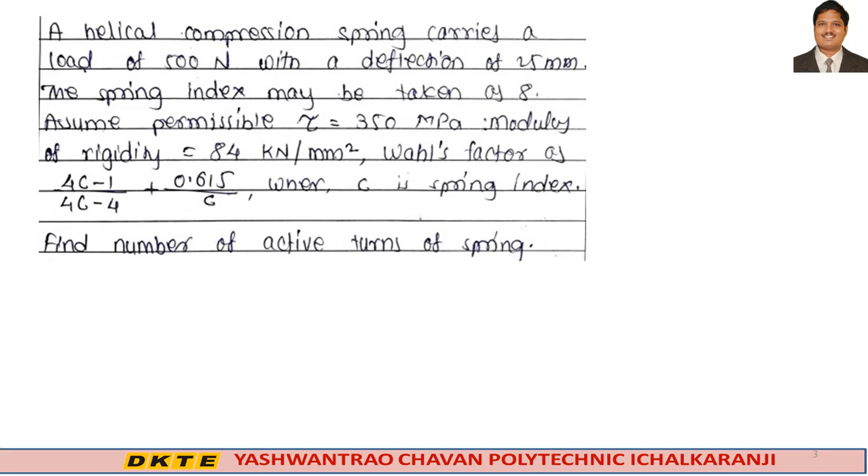So first write the given data: load is given 500 Newton, deflection delta 25 mm, spring index is 8, shear stress 350 megapascal converted into Newton per mm², and modulus of rigidity is 84 kilonewton per mm², convert it also to Newton per mm².

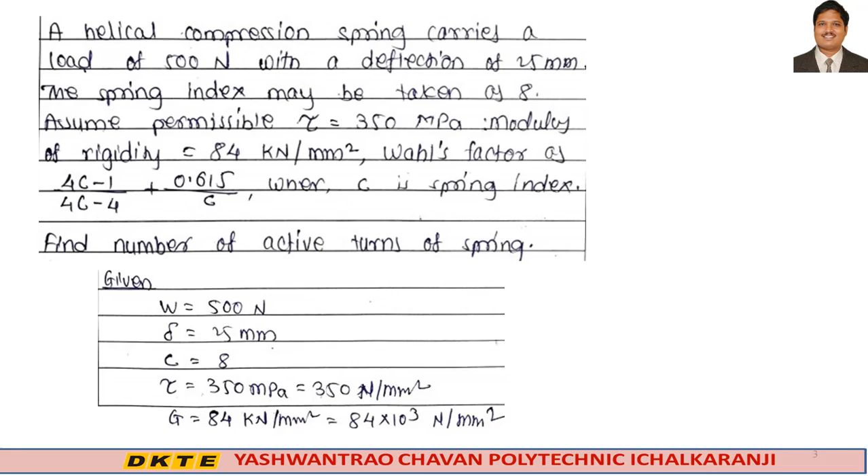First, Wahl's stress concentration factor is denoted by K. We know that K is equal to 4c-1 divided by 4c-4 plus 0.615 divided by c. In that formula put the value of c, spring index, as 8.

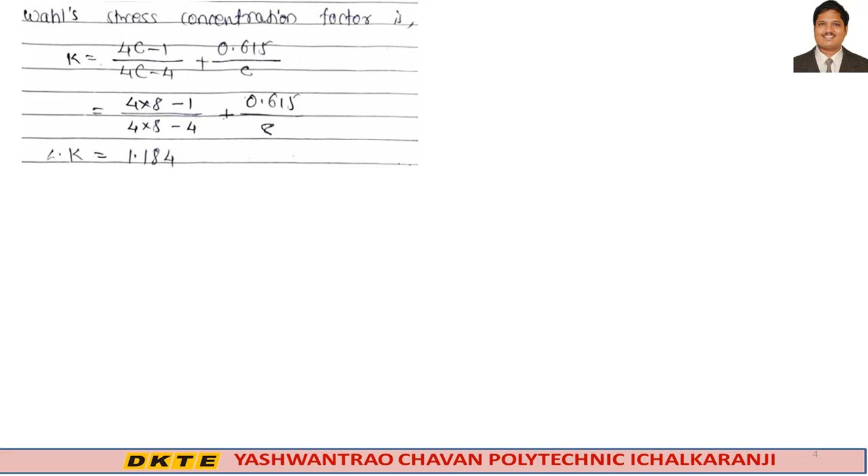Get stress concentration factor K is equals to 1.184. Maximum shear stress induced is given by tau, we know the formula, Wahl's stress concentration factor K into 8WD divided by pi d cube. Simplify it: K into 8WC divided by pi d square.

We will write C here because C is capital D upon small d. We can put C here, capital D upon small d as C, means D goes and C comes here, and instead of d cube here is d square, means capital D upon small d is C.

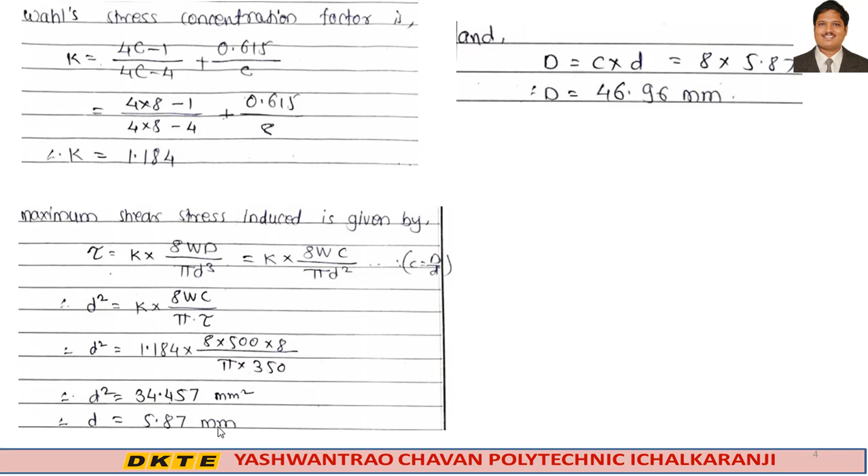From this we will get diameter of the wire, spring wire: d square is equals to K into 8WC divided by pi into tau. Put the values and get the diameter d is equals to 5.87 mm, and capital D is C into d, spring index into wire diameter, means capital D is equals to 46.96 mm.

Number of active turns is calculated from the deflection formula, which we saw in the starting lecture, to calculate number of active turns. The formula for deflection: delta is equals to 8WD cube into n, small n, n is the number of active turns, divided by Gd raised to 4.

Put the values here, only small n is the unknown, so we can easily get small n, which is 6.0190, means it is nearly, we can say 7. Total number of active turns are 7, which is asked in our problem.

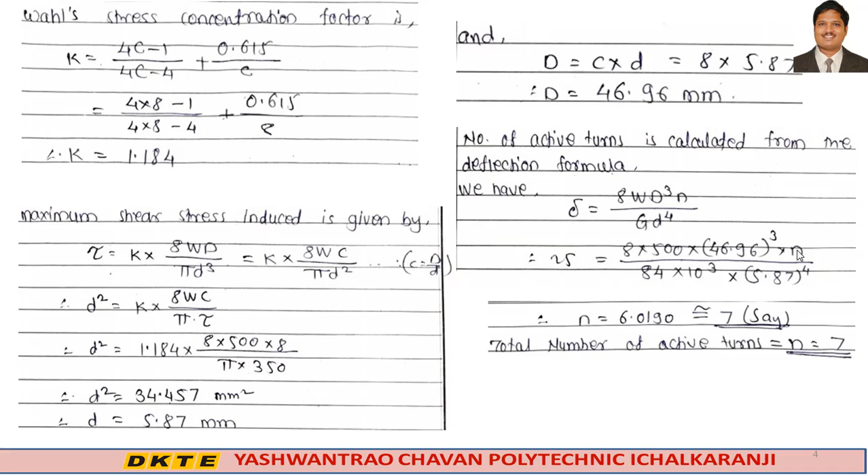This is our answer. Let's see one another problem.

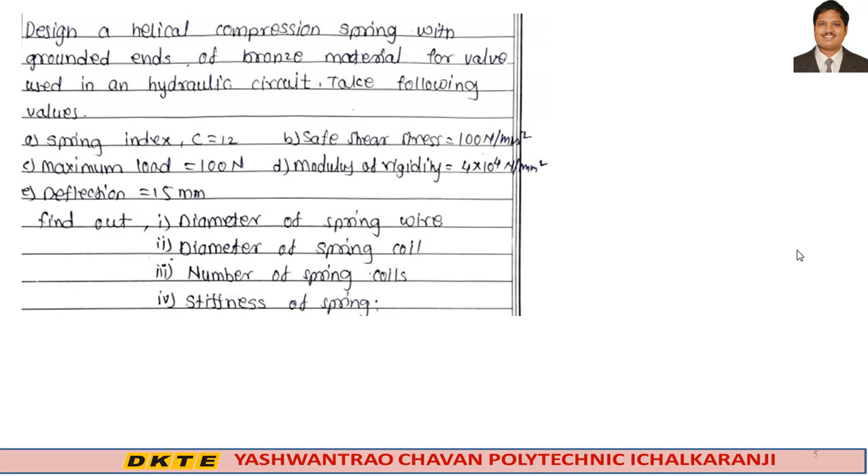First write down the given: Delta 15 mm, load W 100 Newton, spring index C 12, shear stress 100 Newton per mm square, and G modulus of rigidity is 4 into 10 raised to 4 Newton per mm square.

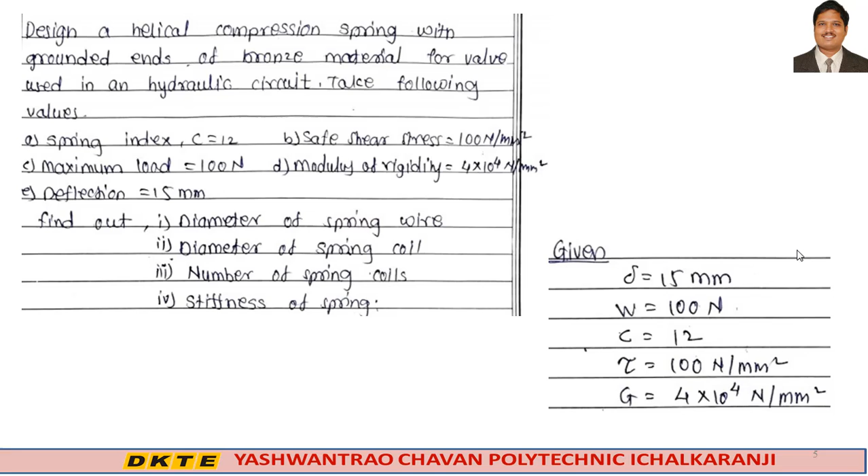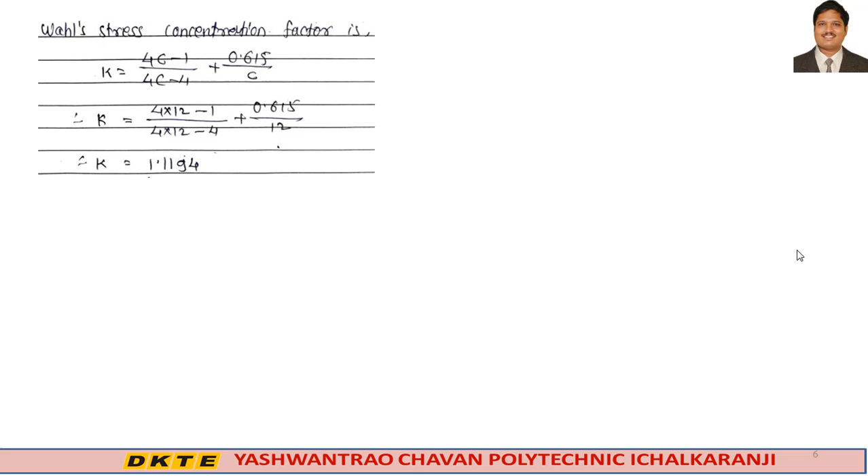Let's start. First, calculate Wahl's stress concentration factor. We know that the formula K is equals to 4C minus 1 divided by 4C minus 4 plus 0.615 divided by C. From this we will get K as 1.1194.

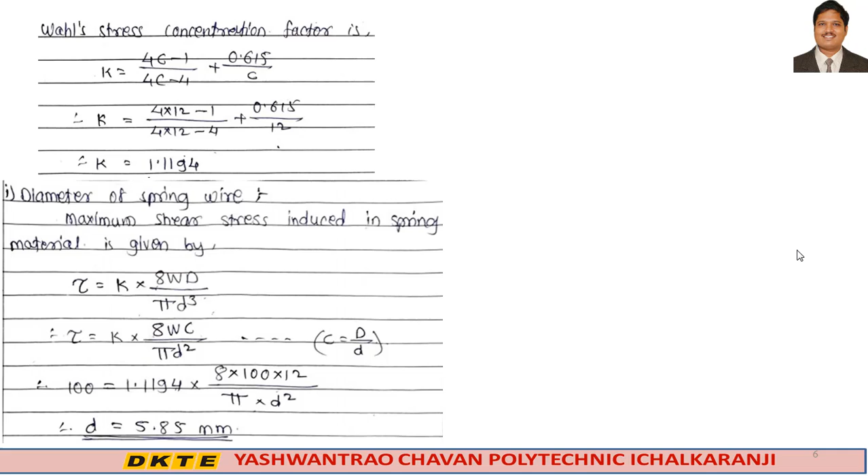After that, find the diameter of spring wire, small d. Maximum shear stress induced in spring material is given by tau is equals to K into 8WD divided by pi d cube. From this we will get small d, which is 5.85 mm.

And mean diameter of spring coil is D is equals to C into d. Put the value of spring index and wire diameter and get the mean diameter of spring coil as 70.2 mm.

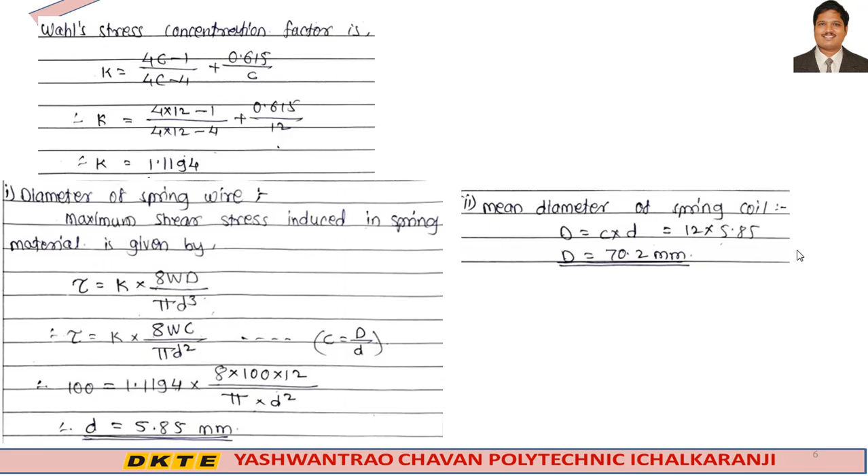Number of spring coils, means number of turns, small n. It can be calculated from the deflection formula. We know that the deflection formula delta is equals to 8WD cube into small n divided by Gd raised to 4. Put all the values and get small n, which is 2.539.

Number of spring coils or turns is n is equals to 2.539. We can say it is 4 for safe design.

Here one note is given: Minimum number of spring coils, means active turns, should be taken as 4 for safe design of spring and its proper functioning. म्हणजे त्या स्प्रिंगचं प्रॉपर फंक्शनिंग जर व्हायचं असेल आणि सेफ डिझाईनसाठी मिनिमम नंबर ऑफ ॲक्टिव्ह कॉईल जे आहेत ते आपल्याला 4 कन्सिडर करायचे आहेत.

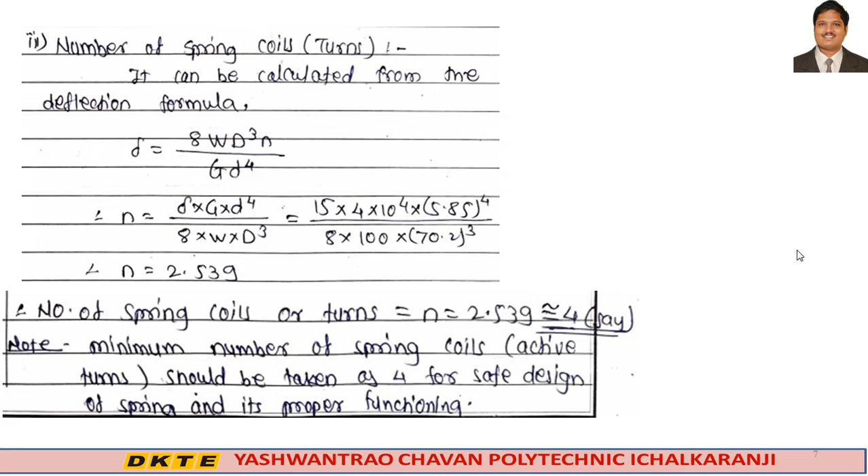याच्या रिलेटेड जे प्रॉब्लेम सोडवणार आहे त्यामध्ये तुम्ही हे ॲझ्युम करायचं आहे की मिनिमम नंबर ऑफ ॲक्टिव्ह कॉइल्स 4 असायला पाहिजेत. आता या ठिकाणी 2.53 जी आपली व्हॅल्यू आलेली आहे, याच्याऐवजी आपण 3 सुद्धा घेतलं असतं, ते कदाचित चालू सुद्धा शकलं असतं, पण सेफर डिझाईनला जाण्यासाठी आपण त्याला 4 करणार आहे.

लक्षात आलं. स्टिफनेस ऑफ स्प्रिंग इज S इज इक्वल्स टू W अपॉन डेल्टा, म्हणजे लोड अपॉन डिफ्लेक्शन असणार आहे. व्हॅल्यू पुट केली, स्टिफनेस आपल्याला मिळाली 6.667 न्यूटन पर mm.

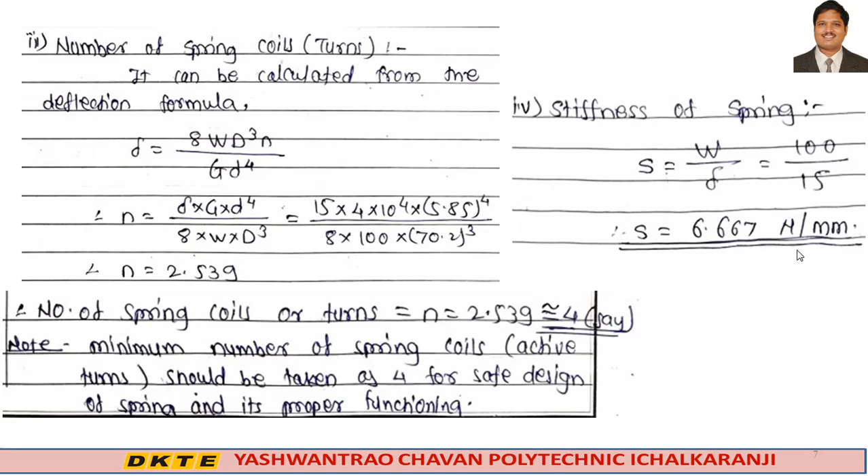We will see another problem. A closed coil helical spring is used for front suspension of an automobile. ऑटोमोबाईलच्या सस्पेंशन मध्ये एक हेलिकल स्प्रिंग वापरलेले आहे. The spring has stiffness 90 Newton per mm with square and ground ends.

The load on the spring causes a total deflection of 8.5 mm. By taking permissible shear stress of material as 450 megapascal, म्हणजे टाऊ दिलेला आहे आणि विचारला आहे आपल्याला फाइंड spring wire diameter, length of spring, and assume spring index 6 and modulus of rigidity G is 80 into 10 raised to 3 Newton per mm square.

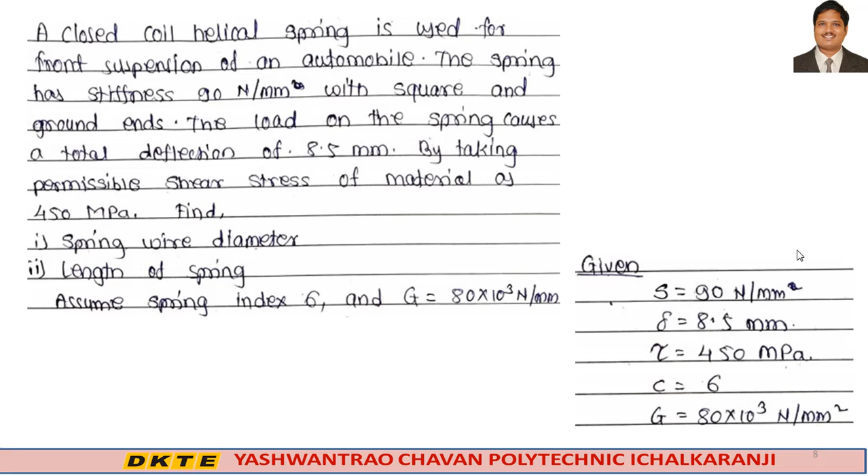Write down the given data first and let's start the solution of this problem. First, wire diameter of spring. We know that spring stiffness S is equals to load upon deflection, means load is 765 Newton.

Then Wahl's stress concentration factor is K is equals to 4C minus 1 divided by 4C minus 4 plus 0.615 divided by C. Put the spring index value as 6 and get K is equals to 1.2525. Maximum shear stress induced is given by the formula tau is equals to K into 8WC divided by pi d square. Put the value and get small d, wire diameter, is equals to 5.70 mm.

This is our wire diameter, small d.

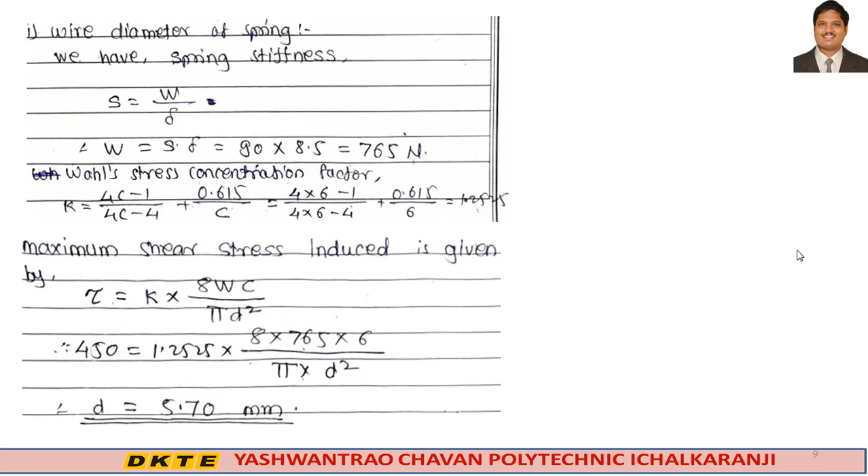Next, mean diameter of spring, capital D, is equals to C into d, and mean diameter of spring coil is 34.2 mm.

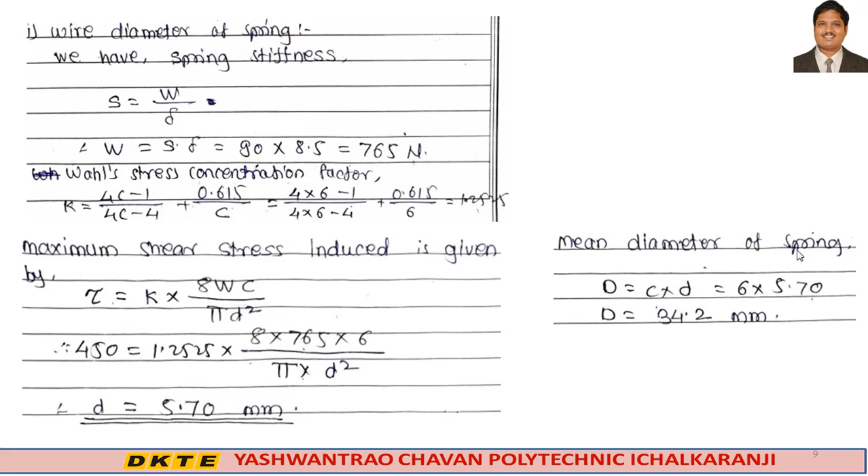Next, they will ask in our problem the length of spring. We know that the deflection of spring delta equals 8WD cube n divided by Gd raised to 4, or we can write it in terms of spring index, which is 8WC cube n divided by Gd.

Here we will put all the values and get the small n, which is unknown. Small n is 2.93, which is nearly equal to 3, we can say here.

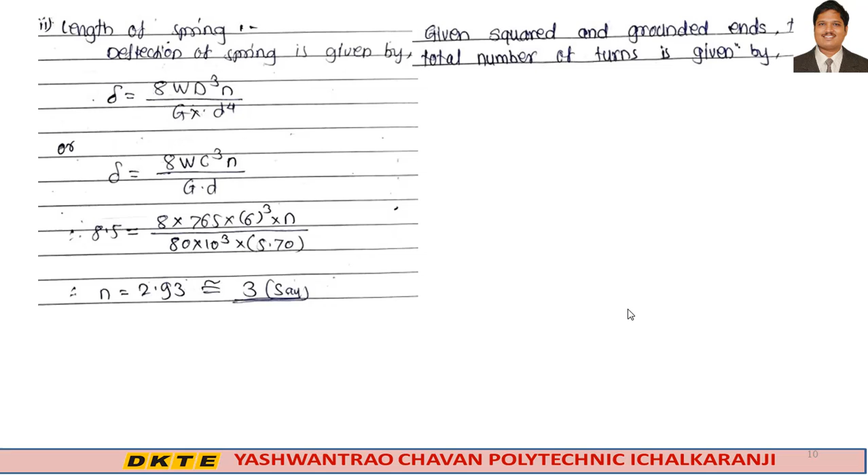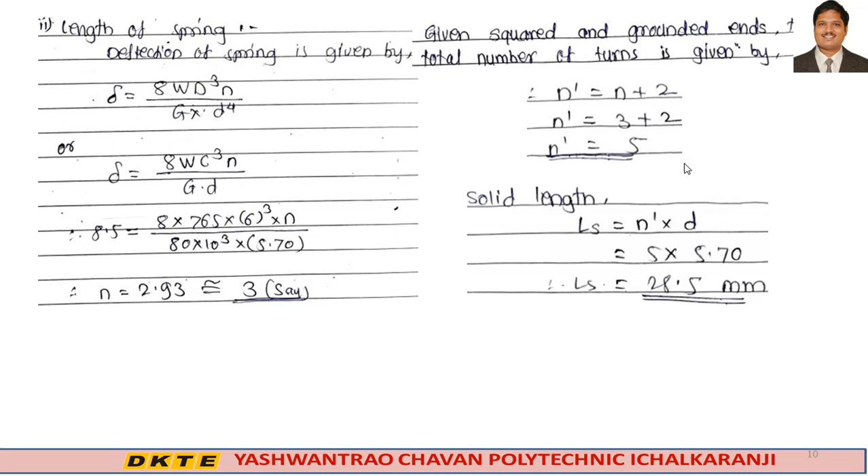n is the active coils, and n dash is the total number of coils, meaning 3 plus 2, which is 5. Solid length Ls equals n dash into d. Put the value and get solid length as 28.5 mm, and free length LF equals n dash into d plus delta max plus 0.15 into delta max. Using this formula, we get the free length as 38.275 mm.

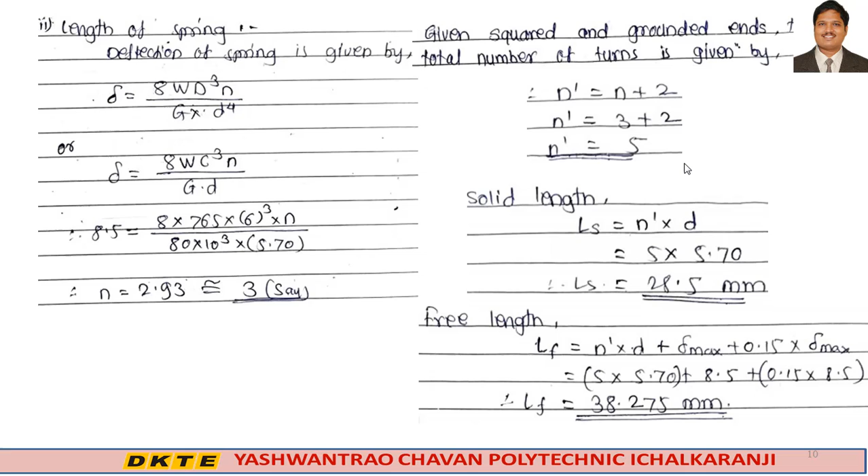See one more problem. A safety valve of 60 mm diameter is to blow off at a pressure of 1.2 Newton per mm square. Pressure is given at this safety valve location.

It is held on its seat by a closed coil helical spring. A closed coil helical spring is used here.

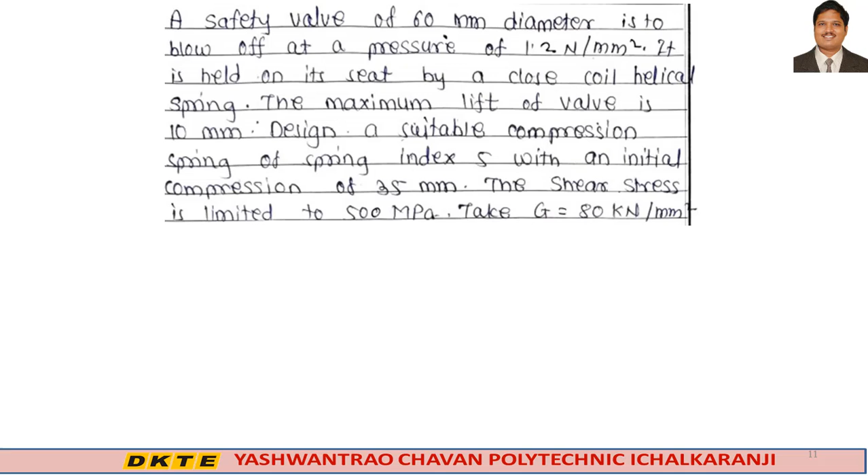The maximum lift of valve is 10 mm. Design a suitable compression spring of spring index 5 with an initial compression of 35 mm. The shear stress is limited to 500 megapascal and take modulus of rigidity G equals 80 kilonewton per mm square. Write the given data first and go for the solution.

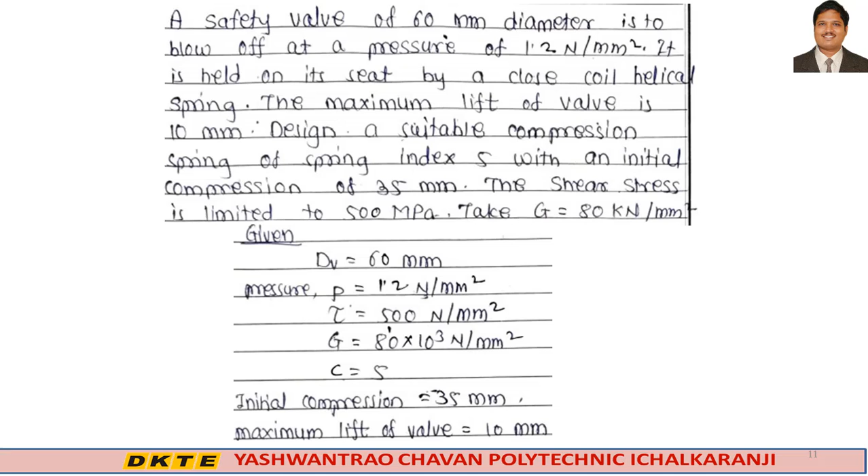Design of helical spring. For designing the helical spring, we will first calculate the diameter of spring wire, that is small d.

Load at which the valve blows off can be calculated. We need to first calculate the load at the location where the valve blows off. W1 is the load at which the valve blows off.

W1 equals pressure on valve into area of valve. Pressure is P and area is pi by 4 into diameter of valve squared, meaning dV raised to 2. Put the value and W1 is 3392.92 Newton.

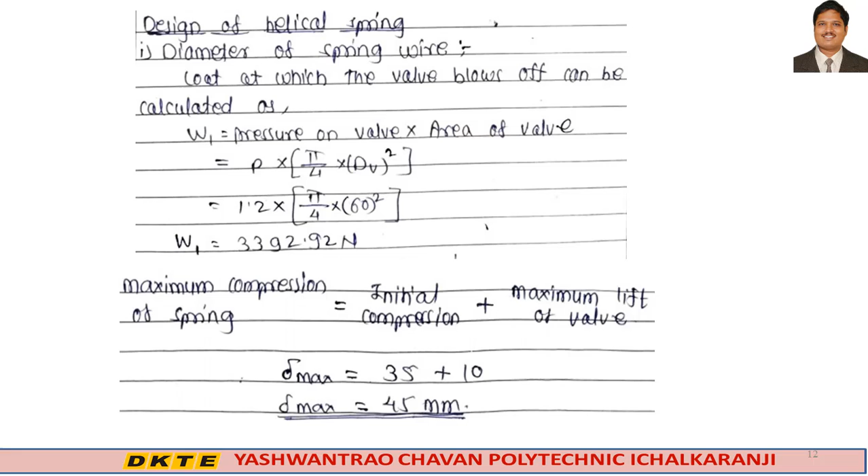Maximum compression of spring is initial compression plus maximum lift of valve, meaning 35 plus 10, and delta max is 45 mm.

As the load W1 is 3392.92, it keeps the valve seated with initial compression of 35 mm.

Therefore, maximum load on spring for maximum deflection when valve is open is calculated as below. Initial compression is 35 mm and W1 is 3392.92, and maximum compression is 45 mm and maximum load is W2. Here we can calculate W2 from this.

W2 equals 3392.92 into 45, cross multiplication divided by 35, which is 4362.32 Newton.

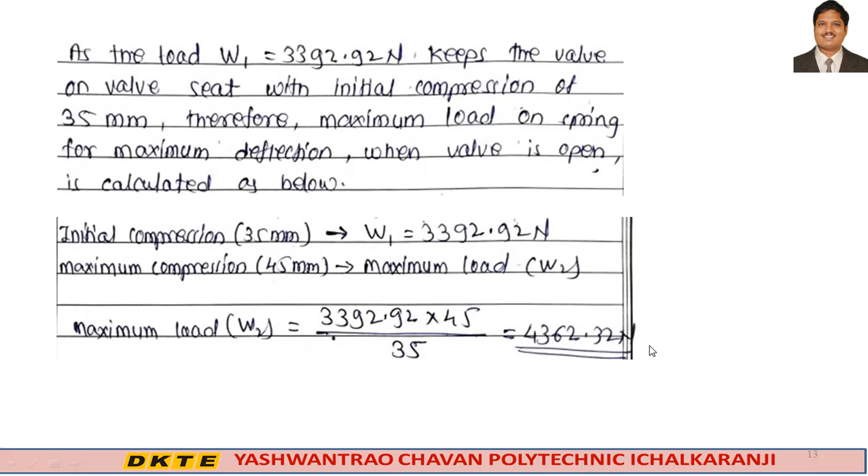Wahl's stress concentration factor K comes here as 1.3105. We know the formula, put the spring index and get this value.

Maximum shear stress is given by tau max equals K into 8W2 capital D divided by pi d cube, or applying the spring index: spring index C equals capital D upon small d, so it is K into 8 W2 into C divided by pi d square.

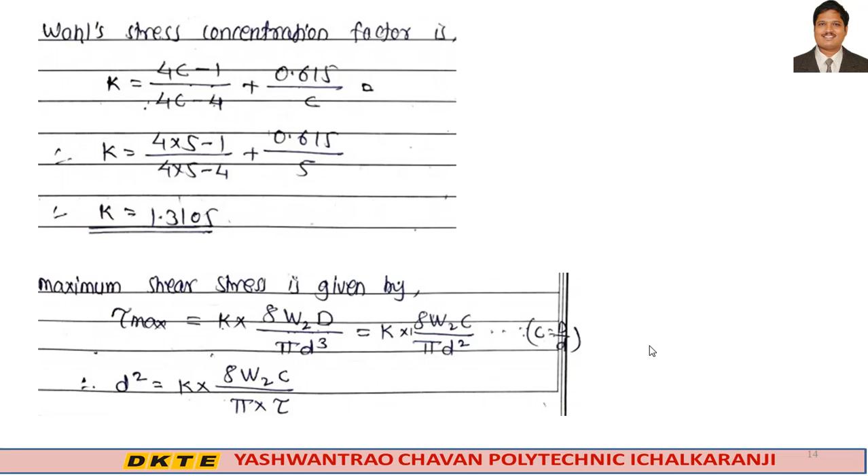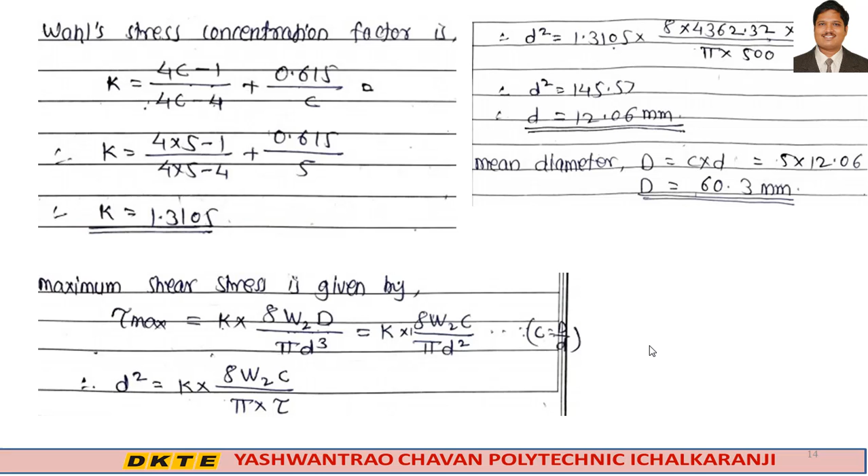From this we can calculate small d. After simplifying, we get small d equals 12.06 mm and mean diameter capital D equals C into d, meaning 60.3 mm.

Number of turns is calculated from the deflection formula. Delta max equals 8W2 into D cube into n divided by Gd raised to 4. From this we get small n and it comes to 9.95, meaning nearly equal to 10.

This is the number of turns. Assuming square and grounded ends, total number of turns is given by n dash equals n plus 2, n is 10 plus 2 is 12, and solid length Ls equals n dash into small d, which comes to 144.72 mm.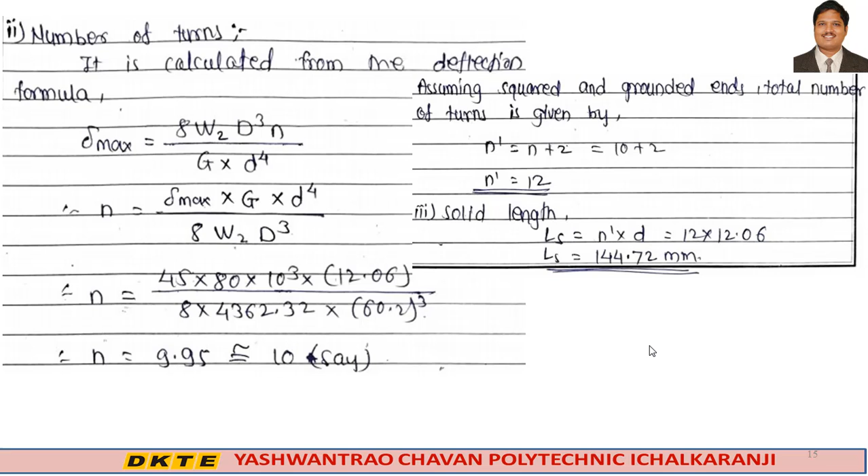Free length LF equals n dash into D plus delta max plus 0.15 into delta max. Put the values and get free length as 196.47 mm, and pitch of the coil P equals free length divided by n dash minus 1, which comes to 17.86 mm. This is our answer.